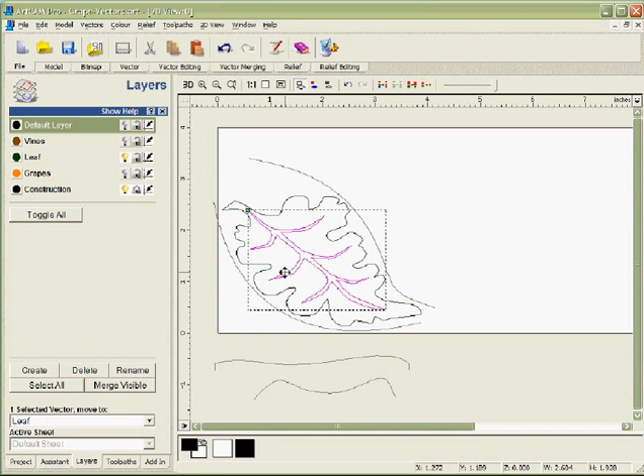To help us do this, I've created some construction vectors that you can see here. We're going to build the leaf in 3 stages. First, we use these construction vectors to create the underlying form. Next, we cut out the shape, and then finally we add the veins onto the leaf.

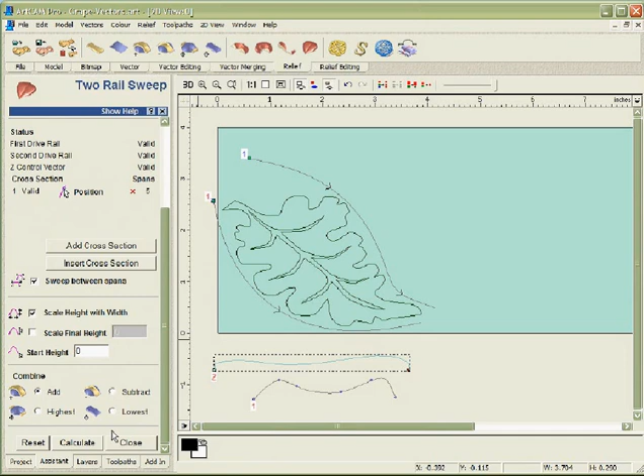The underlying form will be created by taking these two vectors and this third vector and using a function to generate a shape from them. In this case we're going one stage further, taking this vector as well to control the Z depth of the shape as it flows between these lines. If we activate the grayscale view and hit calculate, you'll see in a few seconds that ArtCAM will generate this shape based on those four vectors.

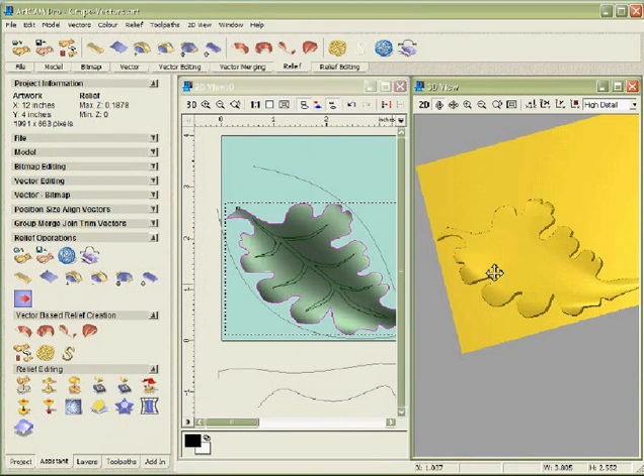If we want to see that shape in the 3D view, we can tile the window and look at both simultaneously. Now I'm going to take the outline of the leaf and chop that out like a cookie cutter. So we just pull up the vector parameters, say we want to trim that, and we've got the shape of our leaf and the underlying form combined together.

Finally we'll take the veins and just add a simple dipped shape into them to generate that profile. There you can see that our leaf has been created. Now we'll switch layers and go on to one of the different shapes.

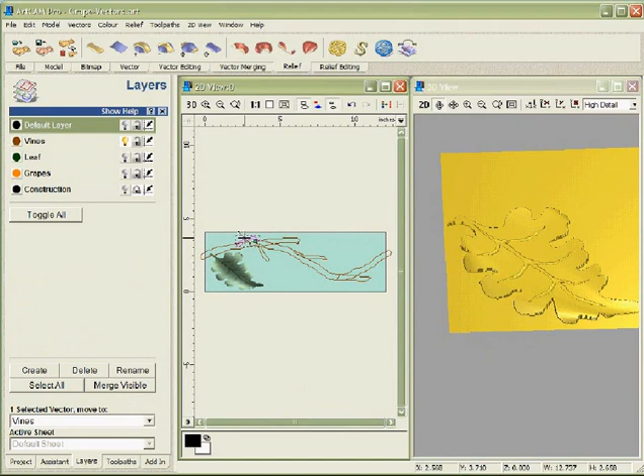So let's undraw the leaf and the construction data and switch on the layer for the vines. The vines again are just simple closed vectors. What we're going to do is grab all of those, bring up the shape editor and just merge those in with what we've already got. Each of the individual pieces will be calculated separately and blended together, which should give us the result we're looking for.

So there we can see, in the grayscale and also in the 3D view, that those shapes have now been created.

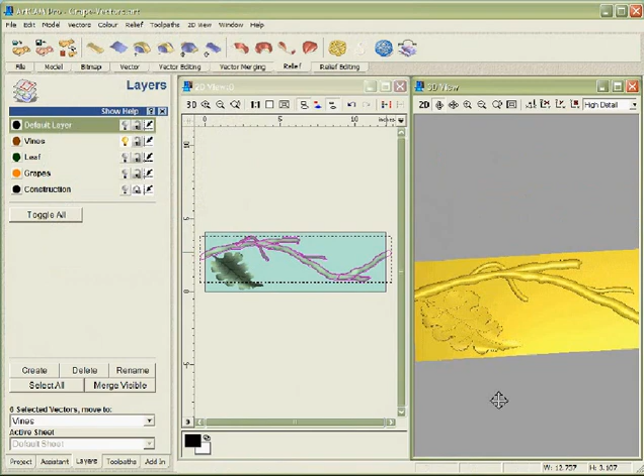Lastly, for the modelling, let's do the grapes. So we're just going to open the grapes up, and these have already been grouped together and assigned sizes that we can start to blend in with the rest of our model.

By using the grayscale view we can easily see the ones that have been built and the ones that haven't, and very quickly start to generate exactly what we're looking for. By giving them slightly different heights we end up with a nice variation in our finished model.

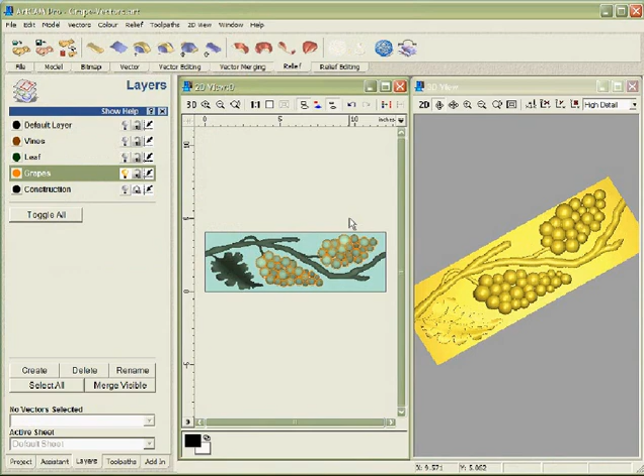At this point we've almost finished the design, but we're going to use the sculpting tools to tidy it up a little. So now let's go into the 3D view and work with our model. You'll see, in the way we built it, there are some definite lines where some of the edge branches meet with the main branch. What I want to do is use the sculpting tools to just smooth those out.

This ability to go in and manually edit an area very quickly in ArtCAM is extremely powerful, and you can see I can literally just start to go in and blend those areas, including the parts where the smaller branches meet and also where we've got these other larger branches coming into the main area. Very quickly we can blend those so there's no seam and they look completely natural.

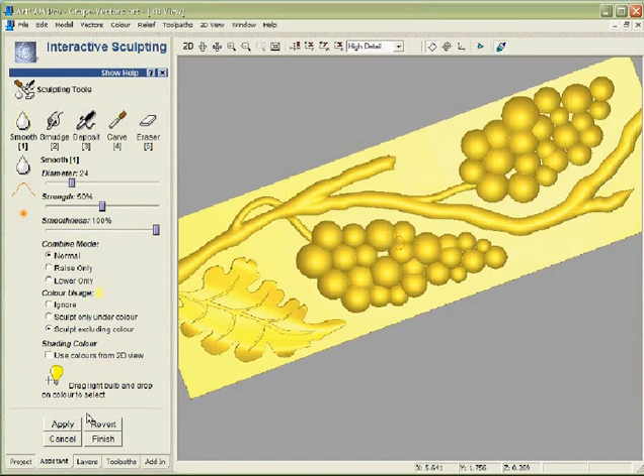Once I'm happy with the way this looks, I'm going to save it, and we can reuse that in a little while.

So with the grapes saved, next we're going to open a part which has the vectors for our standard moulding profile. What we want to do is build this moulding, you can see the vector for it down here, and then combine our grapes with it. Now I've used ArtCAM to generate the vectors for this, but I could have imported it from another design package, or taken this data from my customer.

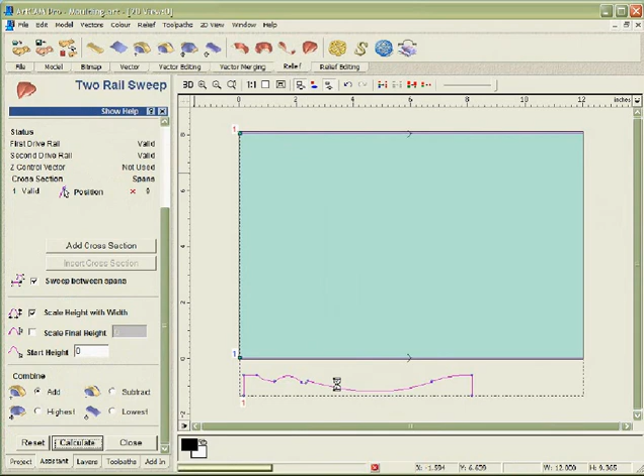To generate the moulding shape, we're going to pick our two drive curves again, pick our cross section, and use our function to calculate this. All Artcam is going to do is take whatever profile we've got here and sweep it along these two curves in order to give us our piece of moulding. You can see what we've got in the grayscale.

Now we've created our moulding shape, let's combine the grapes with it. If we come back to the 2D and load the file where we created the grapes, you can see it's possible for me to combine any combination of Artcam files together to create a new design. If I wanted to, I could even combine just one small piece of this.

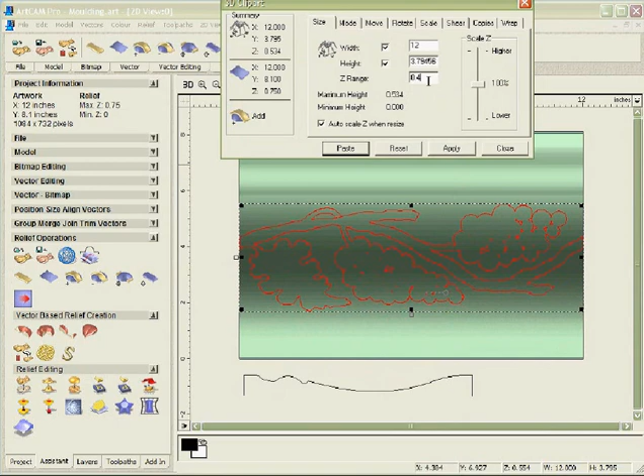In this case, I want to take the design as it is, I'm going to position it accurately. I'm even able to create a different sized version of it by changing the Z height of this, and then we're going to hit paste, and the grapes are combined with the geometry that's already there to create a new model for us. Notice that they perfectly follow the shape of the moulding, so we've been able to generate this part here by combining the two different Artcam models together.

We could now take this part and create multiple copies of it in order to create different lengths of moulding that we wanted to cut. We could generate CNC toolpaths on it then and actually take it and run it on our machine. However, in this case I want to show you going one stage further and actually using the design we've got here not just for a flat piece of moulding but actually to create an archway.

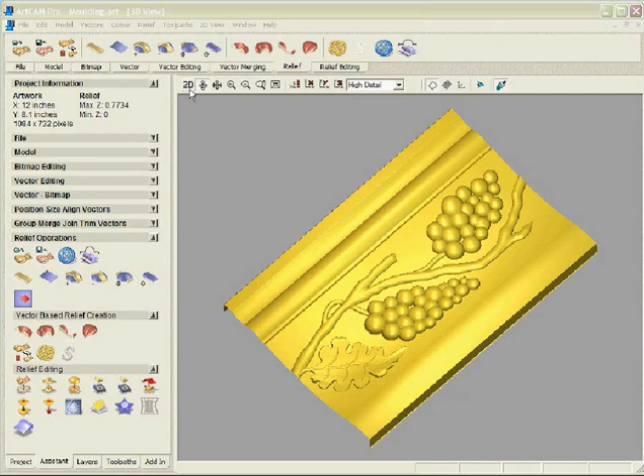We're going to capture the design that we've got in this part here by using a box that we've drawn around the model. I'm going to ask Artcam to copy the relief that's under that box. So this 3D image has now been captured. The actual 3D model has been captured by Artcam and put onto the clipboard.

We can now go into another session of Artcam, one that I already have running here, and you can see I've generated a simple arc which is going to be our archway. Now, because Artcam knows what's on the clipboard, in effect that 3D data, I can paste it in. I could, if I wanted to, manually manipulate this to create a new shape or design.

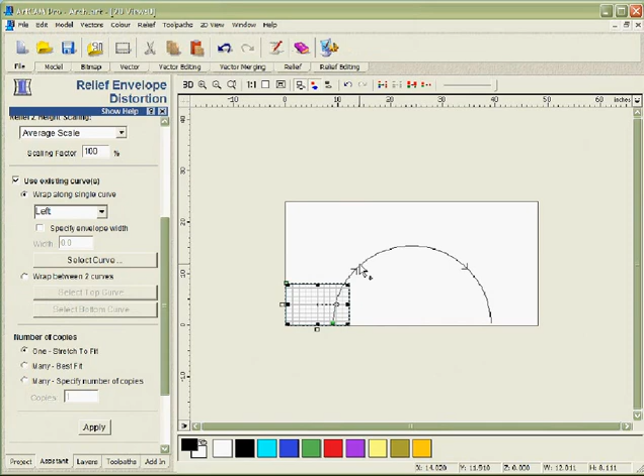In this case though, I'm going to use a curve, I'm going to select the curve here, and I'm going to ask Artcam to fit as many as it can around that. Then we'll simply say finish, and we'll let the software do the calculation. This is just going to take it a few seconds now.

What it's doing is capturing the data from the other part. It's multiplying it, as you can see from the design on the screen, 5 times, but it's also bending it and distorting it around this arc. This is a tremendously powerful function, wherein you think that you can now take any Artcam model that you generate, whether it's something you built yourself, or scanned, or something that somebody else has modelled, and you can distort it in order to create new designs within your part.

If we look at the grayscale, there's the finished view. We can go into the 3D, and you can see the full part that we've got now from that design is this arch that's been created.

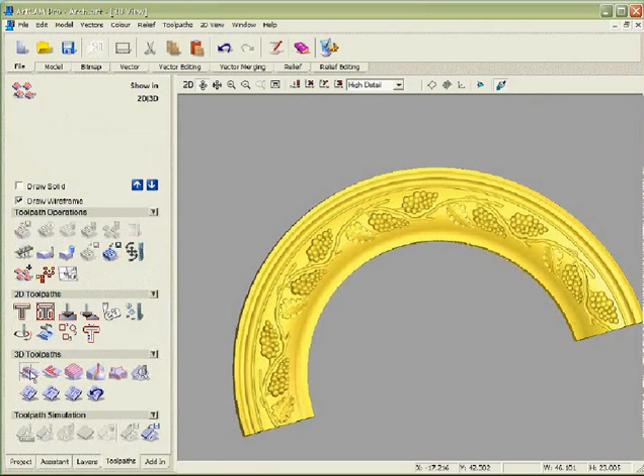Now, to finish the demo, let's generate some toolpaths on this as if we were actually going to machine it. We'll select a boundary, go into our toolpath calculation, realign our view, so we only want to cut inside of that boundary, and set up some parameters for our toolpath.

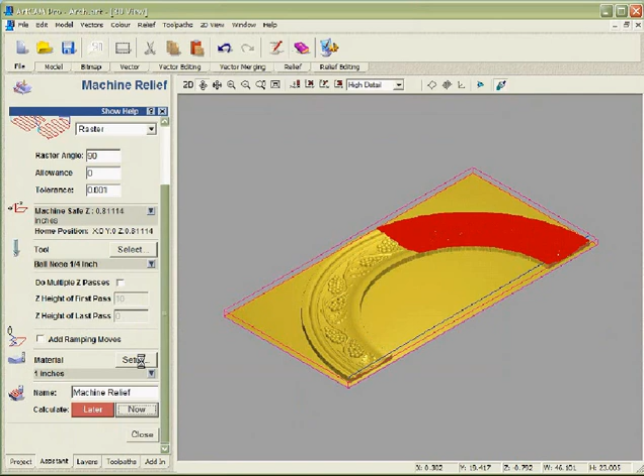We can set up our material, in this case maybe I'm cutting it out of 1 inch material, and now we can do the calculation. You can see Artcam calculates toolpaths extremely quickly, even over something this size. This arch is 4 feet in diameter.

Once we're happy with that, we can see our toolpath, we can output that to our CNC machine. In this case though, I'm going to simulate it so I can see exactly what I'm going to get when this cuts. What this means is I can verify for sure the part that I'm going to get before I waste time or material running it on my machine.

If I'm happy with the look and the finish of that, I could also generate a cutout pass for this, and then I could send it to my CNC machine and we'll be able to generate a very high profit, high quality item to sell to our customers.